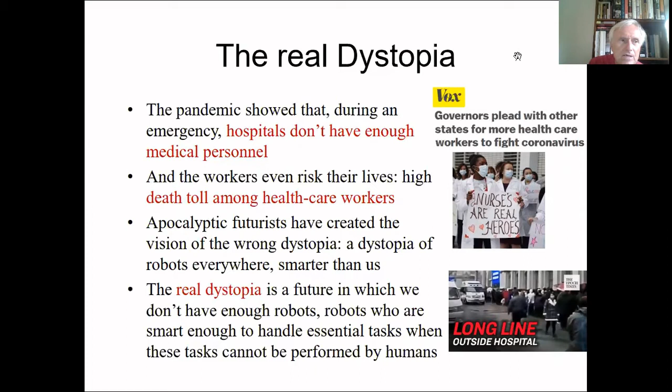So the futurists who like apocalyptic scenarios have created the vision of the wrong dystopia, a dystopia of robots that are everywhere, that are smarter than us, they control us. The real dystopia, which is coming very soon, and for real, is a future in which we don't have enough robots, and we don't have robots smart enough to handle the essential tasks when these tasks cannot be performed by human beings.

So I think this pandemic could be an opportunity to accelerate the development of medical robot technologies. That's where we are very weak. Years ago, very famous, there was a DARPA Grand Challenge for self-driving vehicles. So I'm calling for a medical robotics challenge, maybe staged in a real hospital.

In general, we've been planning all these smart cities. China in particular has more than 400 smart cities now. And all over the world, the cities are trying to get smarter and smarter. We forgot it has to be safe and it has to be resilient in case of a major crisis. So we should start thinking about safe and resilient smart cities.

Let's not forget that when we build cities and we make cities bigger and bigger, we increase the chances of a virus spreading very quickly. Because, precisely because of the nature of a city, mass transportation, and more crowded spaces.

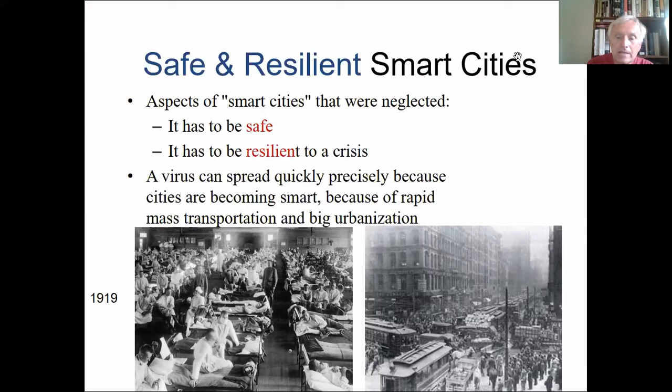So these pictures are from 1919. The flu pandemic, the so-called Spanish flu that actually started in the United States. Spain is the first place where it came out. The first place where it shows up is not necessarily the place where the virus was born. Anyway, 1919 was a good example. That was a time, besides being a time of crisis because of World War One, but it was a time when so many big cities had reached a high density of population.

We are happy that Ebola, which is a lot deadlier than COVID, we are lucky that it originated in places where people don't travel much, and originally in villages. Unfortunately, the latest wave also reached towns, major cities, but it originated in villages in the jungle, in places with little international travel. But we have to prepare for the fact that Ebola or something like Ebola could travel to a major city.

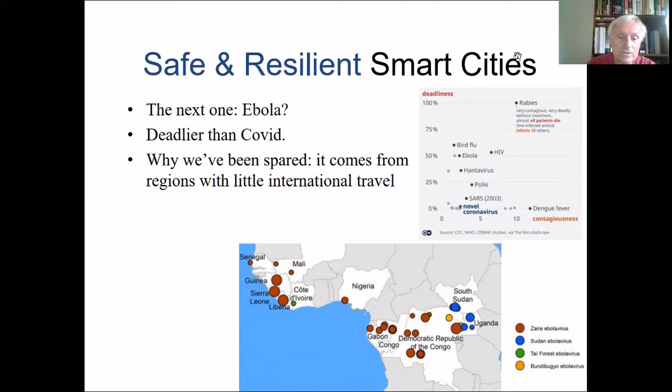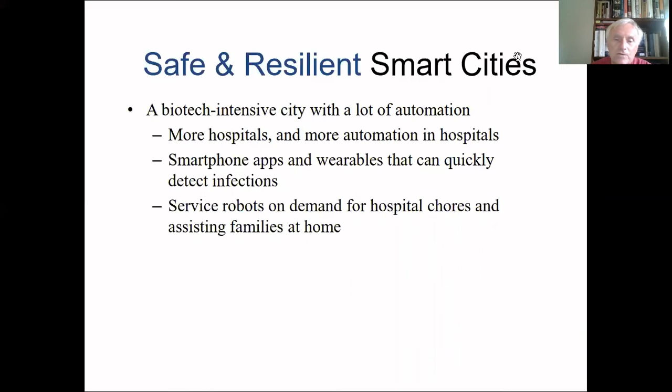So what's a safe, resilient, smart city? It's a biotech intensive city with a lot of automation. It has more hospitals. It has more automation in hospitals. It provides citizens with smartphone applications and wearables that can quickly detect infections. And it is equipped with service robots on demand for hospital chores and for assisting families at home.

We need robots that can expand the hospitals quickly, robots that can replace nurses and doctors in hospitals, robots and drones to deliver food and medicines to people who cannot move from their home, robots to detect and neutralize biological organisms in buildings, and robots that can be programmed to take over in restaurants and shops.

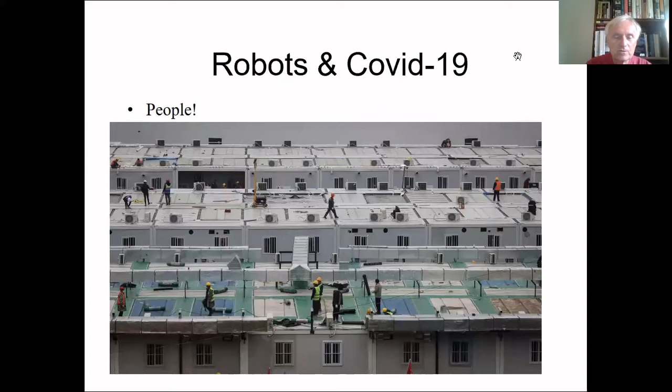This has been a complete failure of artificial intelligence and robotics. Remember the Wuhan hospital that was built in 10 days? This made news all over the world. In 10 days, they went from that picture to a real hospital. Well, who built the hospital? If you zoom on the pictures, it's people. People built the hospital, not robots.

There are success stories of robotics in healthcare, and the traditional one is surgical robots, the main one. The famous Da Vinci surgical robot is used in many hospitals of the world. But now we need non-surgical medical robots.

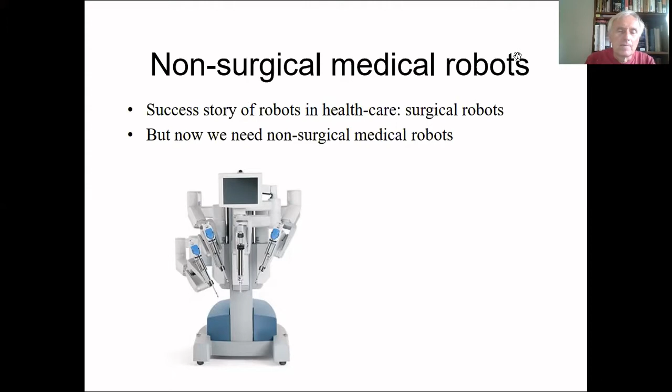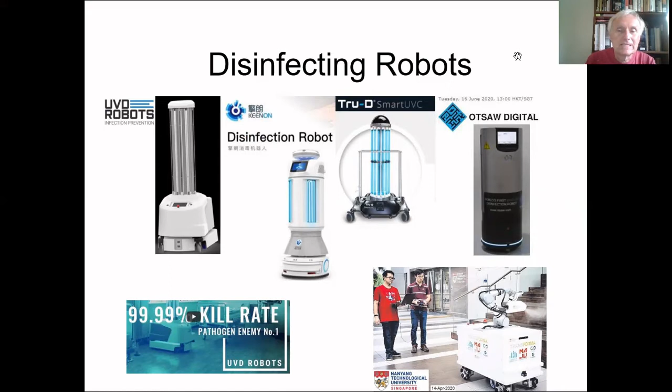That's the real story that we have to invent quickly. The technology is already there. There are already disinfecting robots, and these are some of the models that can be purchased.

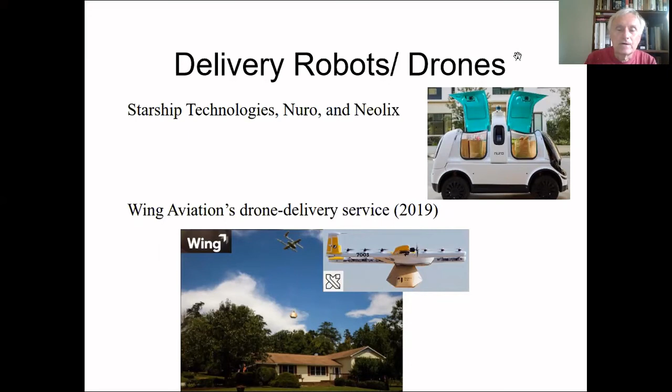There are delivery robots, of course. There's been so much hype about self-driving vehicles. The reality is not what the hype says, but they still exist. When the streets are empty, by the way, these are more feasible than when the streets have a lot of traffic.

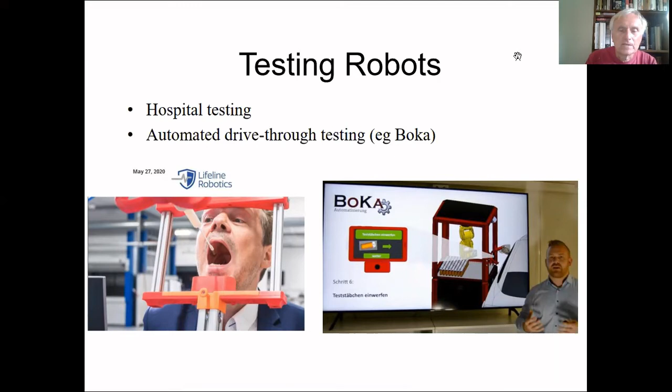We have robots for testing people, although I haven't seen them used in practice, but a couple of companies introduced them. Telemedicine has been possible for a while, and this pandemic forced a lot of doctors to start using it.

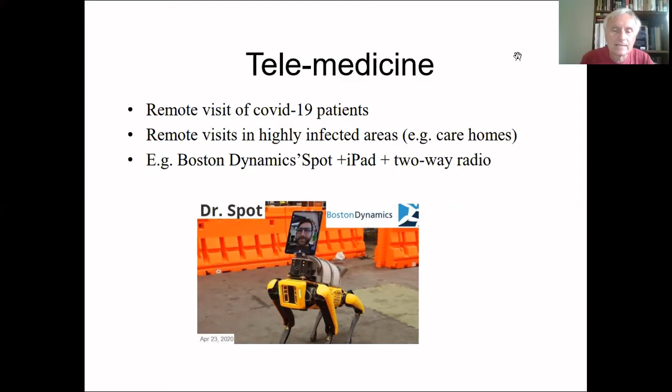For example, Boston Dynamics adapted one of its robots to become a communication tool between doctor and patient. And robotic assistants have existed also for a while.

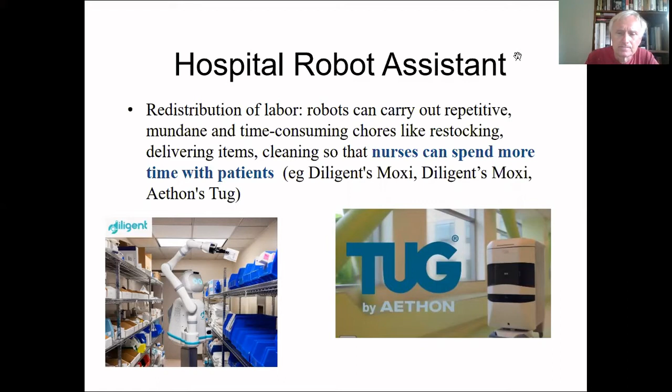There are several on the market that some hospitals have been using. They can do laboratory chores like loading and unloading devices, sorting test tubes—routine jobs that right now take up a lot of time of nurses. And when nurses are super busy, this is time consuming and a waste of time for badly needed nurses.

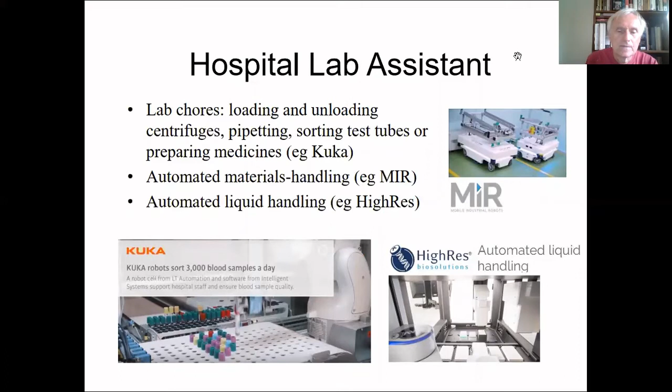I wanted to mention in particular this center in Houston, which is in a sense the prototype of the robotic hospital. It's probably one of the most automated hospitals in the world. It has a cooperation with a company, ABB, that makes robots, and the robots are used intensively in this center.

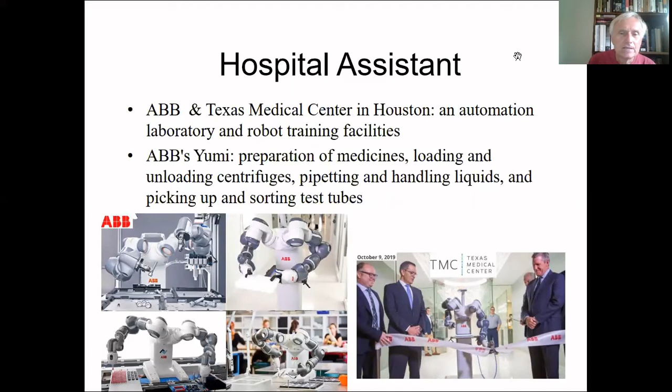So anyway, hospital assistants exist, but not very widespread. One thing we learned is that we are actually not able to make face masks, respirators, and so on at the scale we need when there is a pandemic.

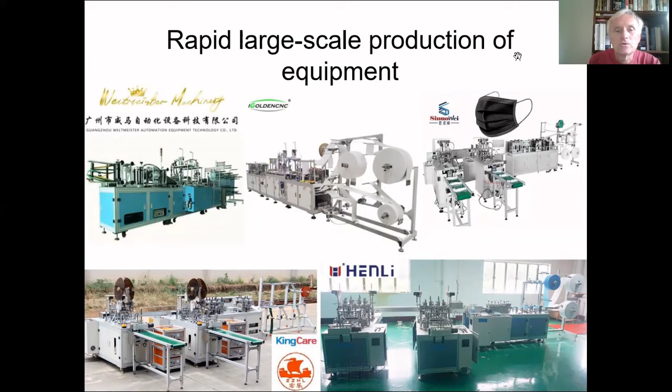The machines exist. Some of the machines are available on the market. So I don't quite understand why it was so difficult to use them.

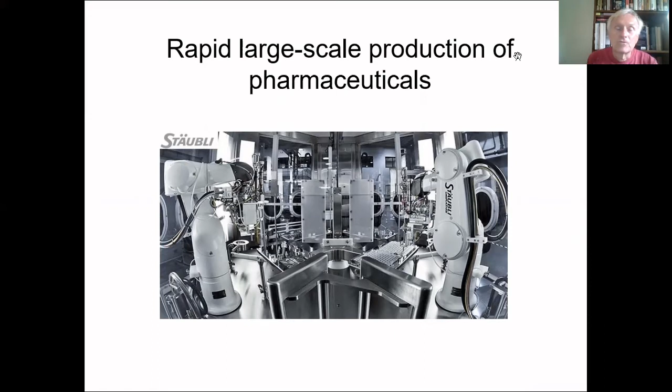For producing pharmaceuticals, hopefully the big companies are coming up to speed, and now we have the first treatments, and hopefully we'll have vaccines soon. A big topic would be the automation of drug discovery.

This pandemic has actually shown us that biotech is very advanced. Within a few weeks, we had the design of potential vaccines, and there are a number already in trial. Nonetheless, it would be nice if this could be done in days instead of months, and also how to identify potential treatments—it's a painful trial and error process right now.

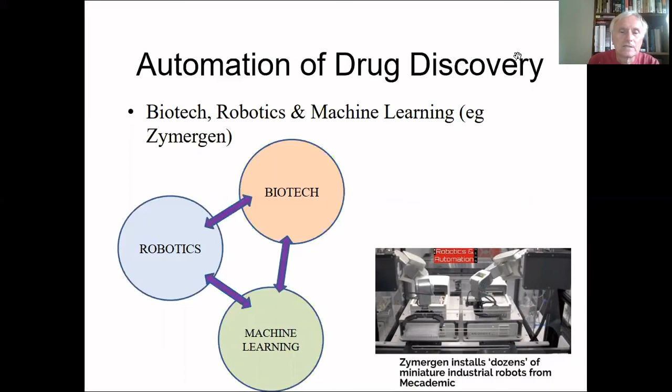So a combination of machine learning, robotics, and biotech would be welcome. I mentioned Zymergen just because it's based near me, but there are many companies trying to combine them. A major conference is coming up in healthcare robotics, and I would be curious to see what gets presented there.

By the way, talking about the apocalyptic views of technology—they're all justified, and we should be careful what we do with technology, what corporations and governments do with technology. But at the same time, there are advantages in using machines.

A food delivery robot or a temperature measurement robot does not see the color of your skin and doesn't know how rich you are. The human who delivers a pizza or anything else to a neighborhood could be influenced by the kind of neighborhood. A robot is not influenced—it does exactly the same thing, whoever you are.

And actually, a good example is the surgical robot. When a surgical robot performs an operation, it doesn't know who you are.

So what we need really is more than just a few startups experimenting with these new technologies. What we need is national programs, in my opinion. Robotics R&D is still largely driven by government initiatives, at least in Asia and Europe. That's a recent report that can tell you more about this.

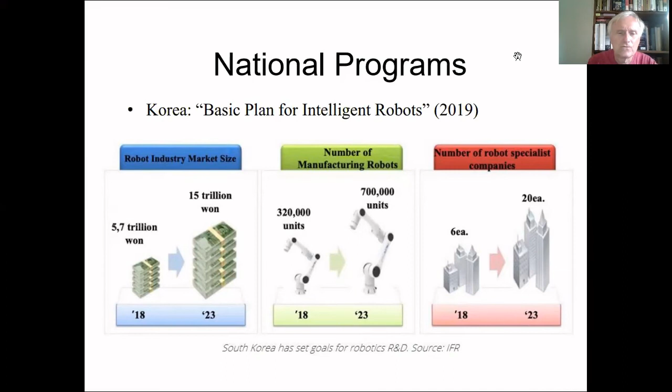Korea has a basic plan for intelligent robots announced last year—an interesting plan, but no mention of the healthcare sector.

Japan is actually the one that has invested more in the healthcare sector, perhaps because it has an older population. Its plan, the new robot strategy, is 5 years old, but it has specifically a section on medical robots.

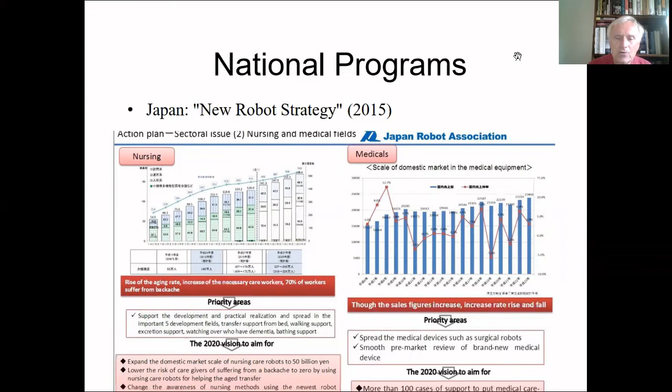The European Union has announced a Horizon 2020 program, but in reality it's really a patchwork of national plans. Germany's is probably the one that is well funded, but again, very little, if anything, about medical robots.

The USA, by the way, has the NRI 2.0 National Science Foundation project for robotics. Budget for 2019 is 35 million, which isn't enough even to buy face masks for everybody.

It's a fraction of what we are spending for this pandemic. So much of the technology exists.

What is the problem? Well, first of all, robots have to be cheap enough to be mass produced. They have to be customizable because each region and each hospital is different. They have to be trainable, able to perform multiple tasks, just like nurses do. Ideally capable of learning from demonstration.

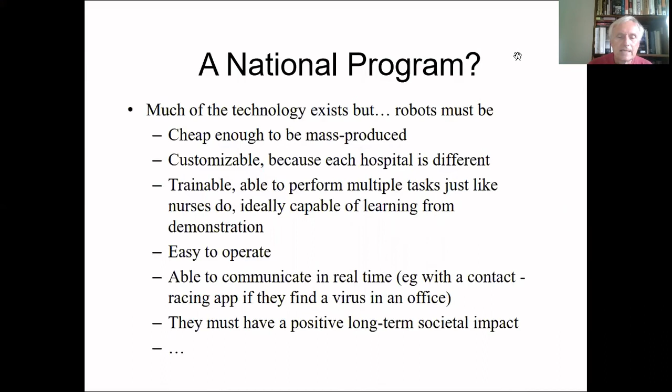Easy to operate, able to communicate in real time, for example with the contact tracing application. They must have a positive long-term societal impact. So that's a call for a national program, but this could also be a call for proposals from industry, partnerships between industry and academia, and international cooperation. And again, a yearly grand challenge where we can deploy them in a hospital and see who does best.

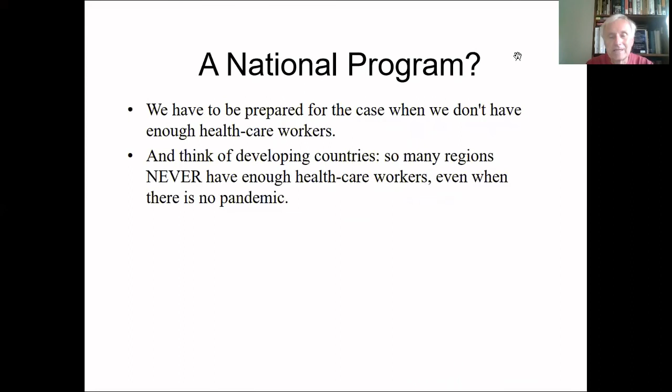We have to be prepared for the case when we don't have enough healthcare workers, and the robots have to take over. And think of developing countries. So many regions never have enough hospitals and enough healthcare workers, even when there is no pandemic. So it's not like if we invent this kind of robotic hospital system it's wasted unless there is a pandemic. There's lots of places where it would be useful right now. And of course, an international program.

Let's imagine together the movie that Hollywood never made, the movie where a hospital is run by robots. Now, in my opinion, the mother of all problems, at least in the West, has been that from the beginning, we planned only for the best case scenario. The virus will not spread, it will be just a flu, there will soon be a cure, there will soon be a vaccine, there will be no major other crisis.

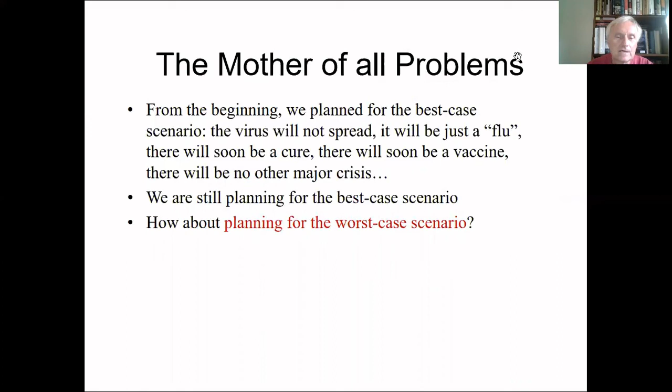What happened in 1918 is instead a good lesson. The virus did spread everywhere. It was more than just a normal flu. There was no cure, there was no vaccine, and it started in the middle of World War I. Hopefully this one will not be so dramatic, but planning only for the best case scenario is not a good way to face the worst case scenario. And we are still planning for the best case scenario.

So AI in particular has been spectacularly useless in this pandemic. With all the hype that came after the introduction of deep learning in the 2010s, the first major crisis that the world has faced was a crisis that relied on humans, on doctors, nurses, scientists, and construction workers. The contribution of AI is really very minimal. I can name a team in Taiwan that has synthesized probably the first antibodies for developing test kits.

Graphene is a startup that helps map the evolution of the strains. Of course, China reused recycled face recognition to identify people who are not wearing face masks. Data analysis, they talk a lot, now they call everything machine learning, but mostly the data analysis that we're using relies on traditional algorithms and seems to have learned very little.

If you're like me, you check the numbers on the popular websites, all you see is just a list of countries and how many people died, how many people are infected. And then you do a division, they divide by the population, and you obtain a death rate. I don't consider this particularly intelligent.

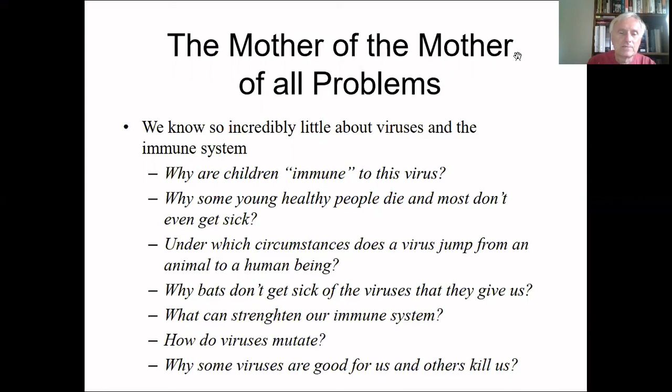How do viruses mutate? Why do they still exist? Why are there so many of them around? Are they all bad, or are some of them good? I read some books that show that viruses are actually essential for our survival. That's very interesting. So this whole thing needs, maybe we need more biologists and fewer computer scientists. Okay, that's the end for now.

I'm a realist, not necessarily a pessimist. I look at what's out there, and artificial intelligence and robotics has mostly failed to help in this pandemic, especially if you consider how much companies and governments have invested in artificial intelligence. Okay, thank you.